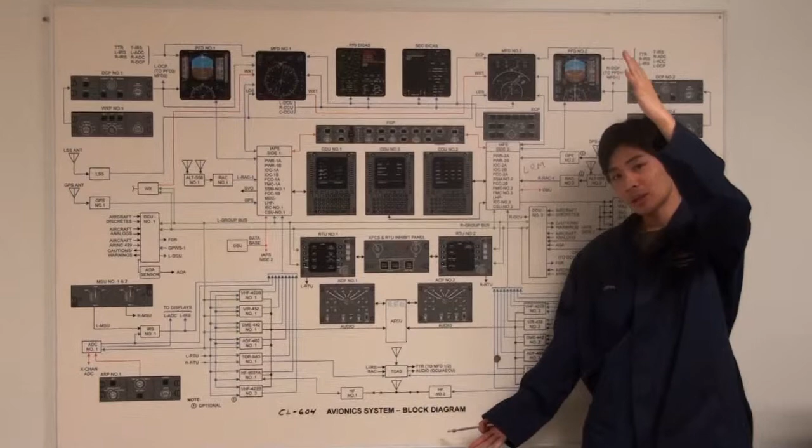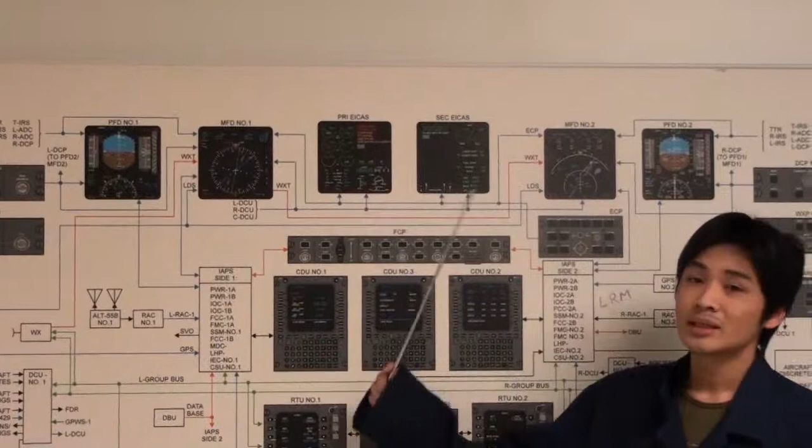This is a basic EFIS system block diagram. Although it may look complicated, it actually simplifies the pilot's job by combining various systems into 3 to 6 CRT or LCD screens. This has the advantage of reducing the pilot's scan area and letting the pilot see flight critical data at a glance. The screens that comprise your EFIS system are PFD, MFD, and EICAS.

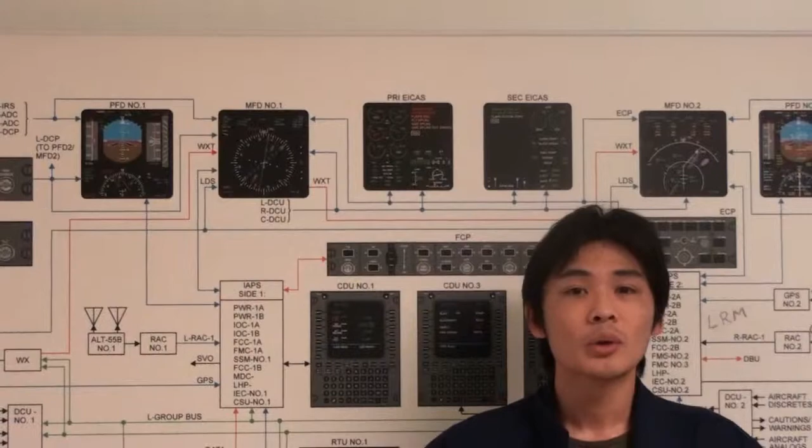Let's take a look at how hectic the pilot's job was before the implementation of EFIS.

Yeah, we're going to do our pre-start checklist. Parking brake, set. Check. Throttle, idle. Throttle idle. Check. Landing gear lever, check down. Check. Down, check. Avionics master switch, off. Master switch off. Flaps up. Flaps up. Check. Propeller, high ram, high RPM. High RPM. Yep. Check. Fuel condition lever. Fuel cutoff. Check. Battery switch, on. Check. Panel lights, on. Check. Check. Fuel quantity. Check. Flight controls. Check. Check. Avionics master switch on. Check. Check weather. Check. Anti-ice equipment test check. Check. Request clearance. Charlie Bravo 90, Bakery Tower, requesting clearance for takeoff. Over. Charlie Bravo 90, cleared for takeoff. Good day. Check. Transponder, stand by. Beacon on. Beacon on.

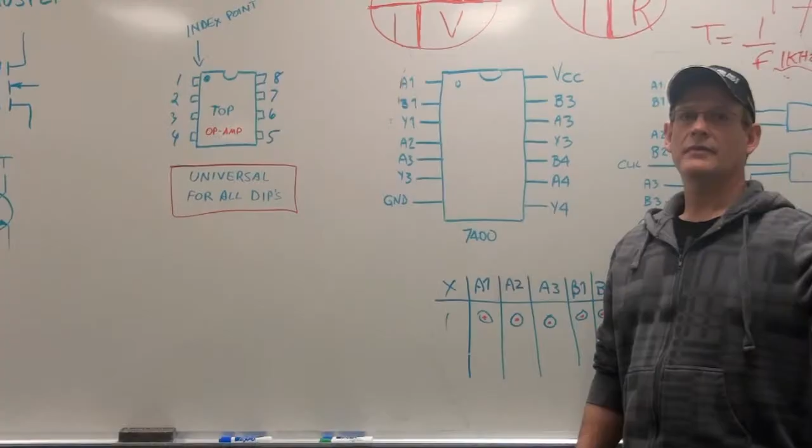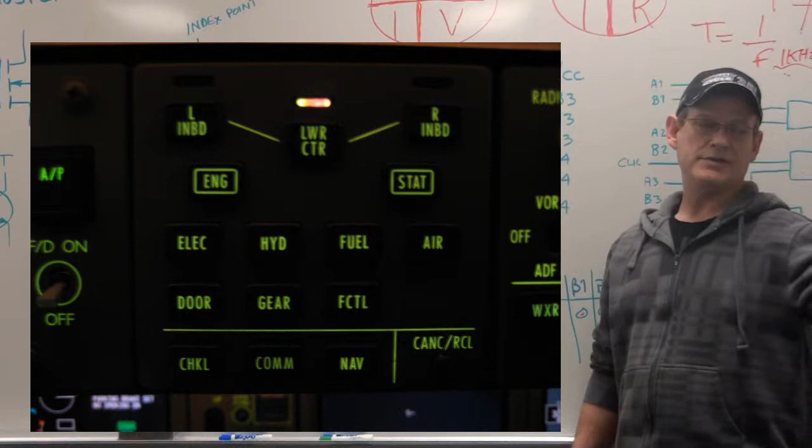EFIS systems have changed over the years because the old way had engine gauges scattered around, whereas now they're incorporated into one screen like LCDs. Prior to EFIS systems, there were many gauges all over the cockpit, making it difficult to monitor everything. Now the EFIS systems have an EICAS control panel to switch between synoptic pages, like hydraulics, which gives you quantity and pressure.

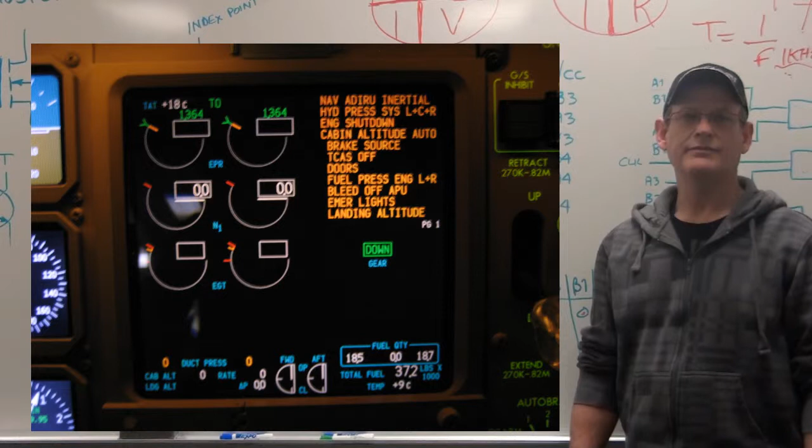You also have engine parameters like EPR, N1, N2, EGT, oil pressure, oil temperature, oil quantity, hydraulic pressure, and vibration. We also have APU information for generators, batteries, and external power.

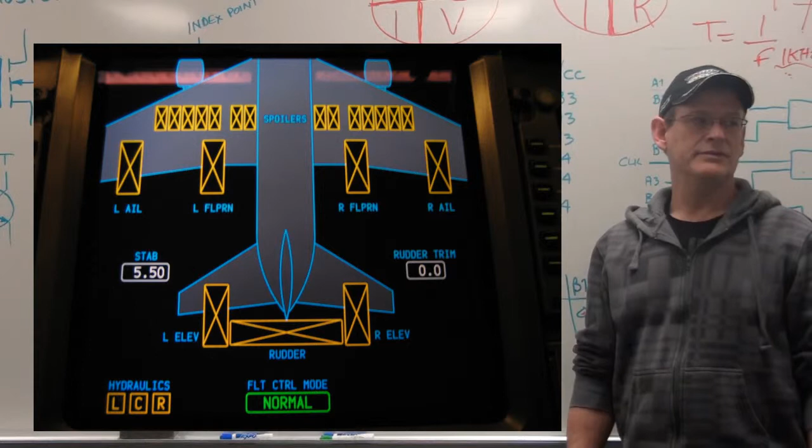As you can see, all these synoptic pages give you information like flight controls, flaps, nose gear, steering, rudder, ailerons, spoilers. You can also check your fuel quantity and cross-feed valves so you know if a valve is open or closed, fuel temperature, doors whether they're open or closed, cabin pressure, temperatures, air conditioning, and security checklists.

All these things are incorporated into separate screens that can be flashed in front of you. Pilots don't have to look all over for smaller gauges.

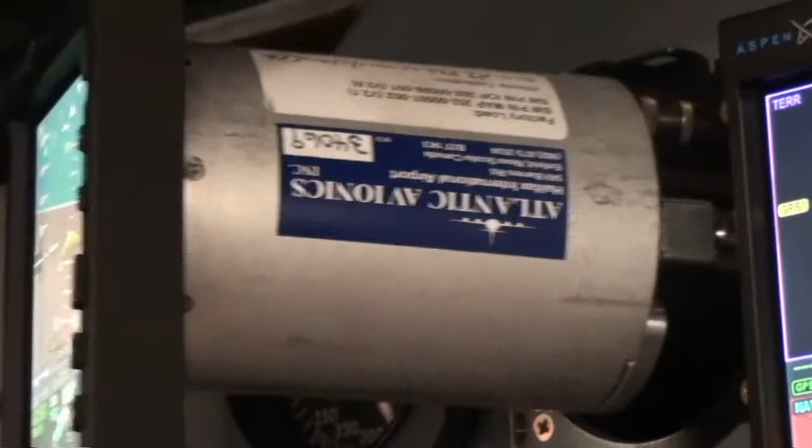You can physically remove the unit so you can see your gyros built internally. That's one of your biggest weight savings there.

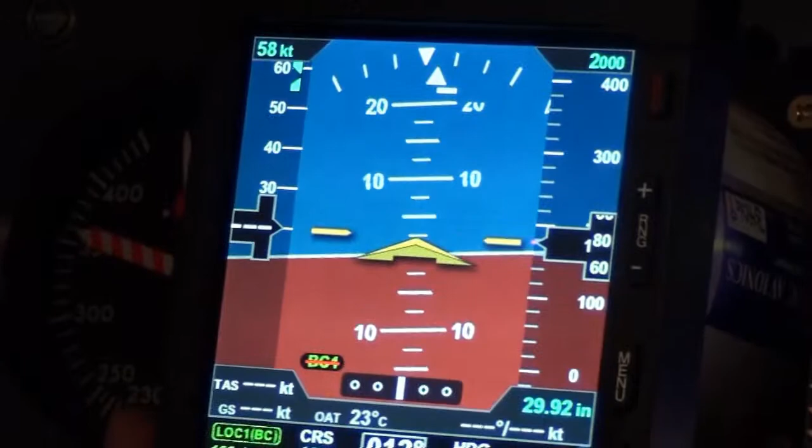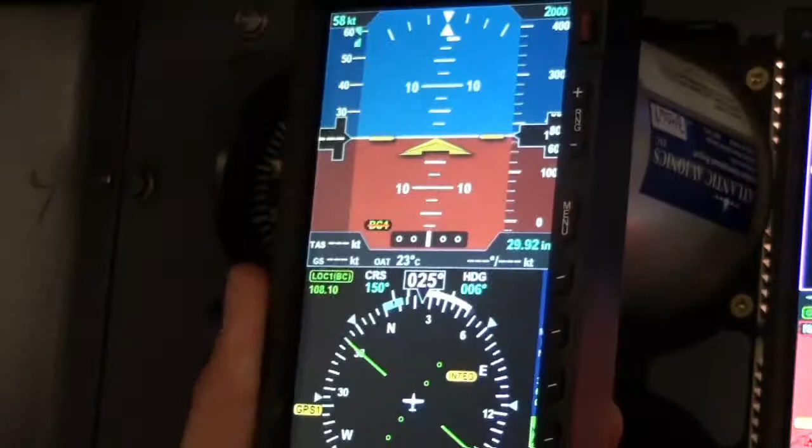If you see when you twist it, you can see the different movements of the aircraft. You can see your pitch and your roll. You can show your airspeed, it'll show your attitude, and you've got the compass on the bottom for your direction, along with your barometric pressure. And it's good for diagnostic procedures also.

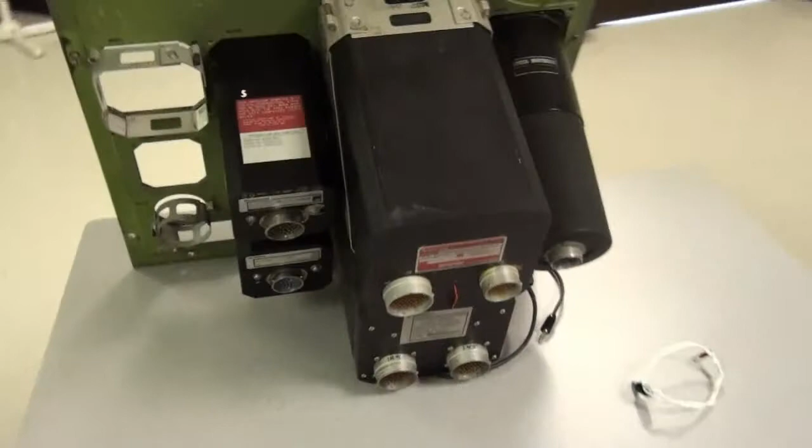That's number one reason you get your weight savings, as all these instruments are very, very heavy compared to the new electronic equipment.

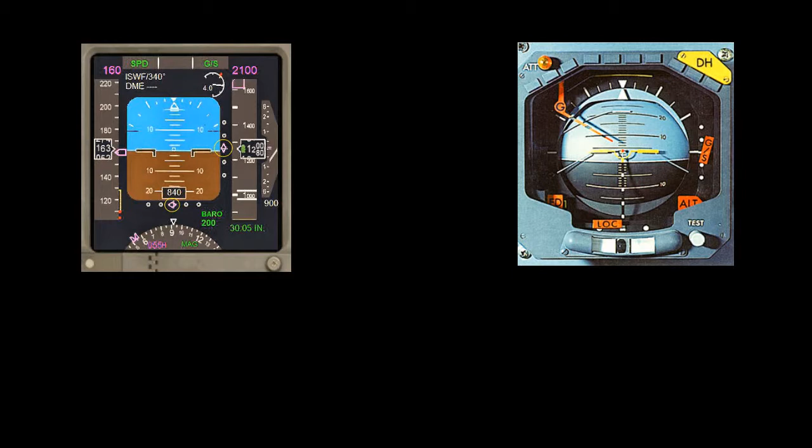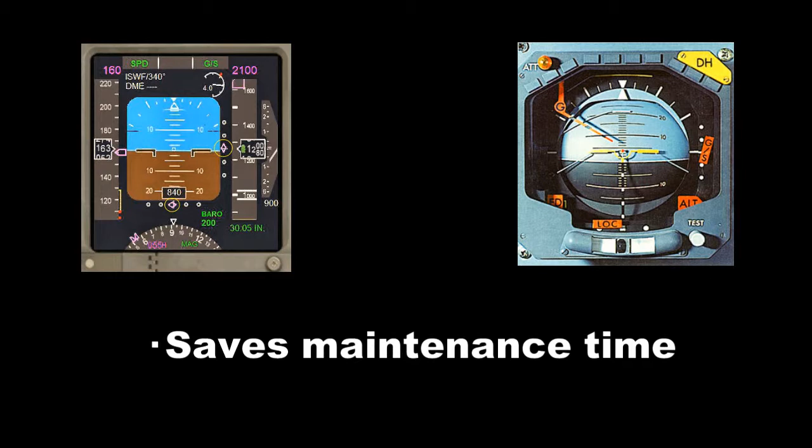Along with this, the new EFIS system saves weight, reduces your pilot's scan time trying to find all your indicators, increases the efficiency of the flight and performance, and reduces maintenance for the maintenance crew.

We hope from this video you were able to see the benefits of installing the EFIS system in your aircraft. From the great reductions in size and weight to the reduction in maintenance time, the EFIS system offers a complete package that any pilot or AME can see the benefits of. We know that from rapidly developing technologies, the EFIS system will continue to evolve into a more complete and comprehensive system, and the sky's the limit when it comes to their boundless potential.